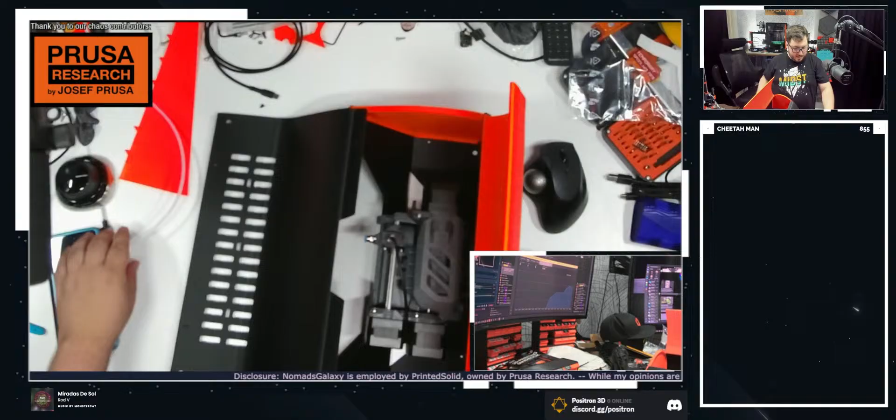Use some spudgers to kind of get that in there. Alright, that's it. There we go. This is done. That's it. Okay.

Let's go ahead and close this up fully. Go.

Now, this is the first time we're doing a test fit. We'll be checking in and out while trying to fix my computer. Good luck, friend.

I would offer my tech support knowledge, but I've left that life behind.

Alright, I'm gonna swap over to my lav mic here, so I don't have to shout.

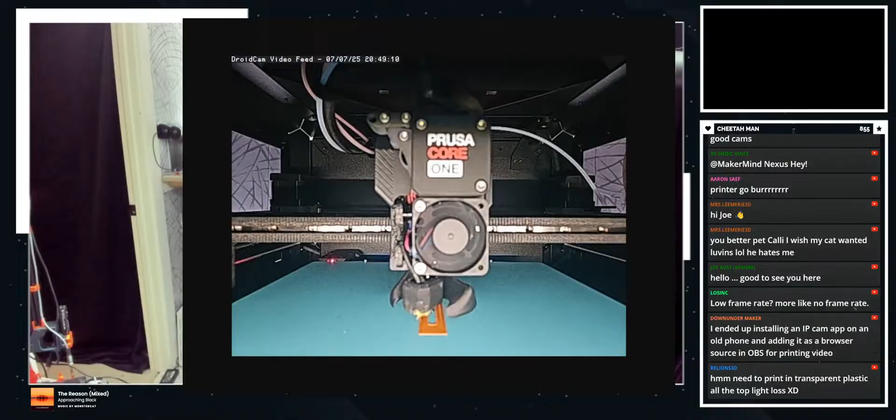Hello Malta, here we go. Yeah, definitely not loving what that PTFE tube is doing, but it's working. As you can see right up there, if I tilt it up, you can see the MMU up there with that green little dot. If we hop up here, you can see your vent grills - you can close them, open them just like normal. But it's working.

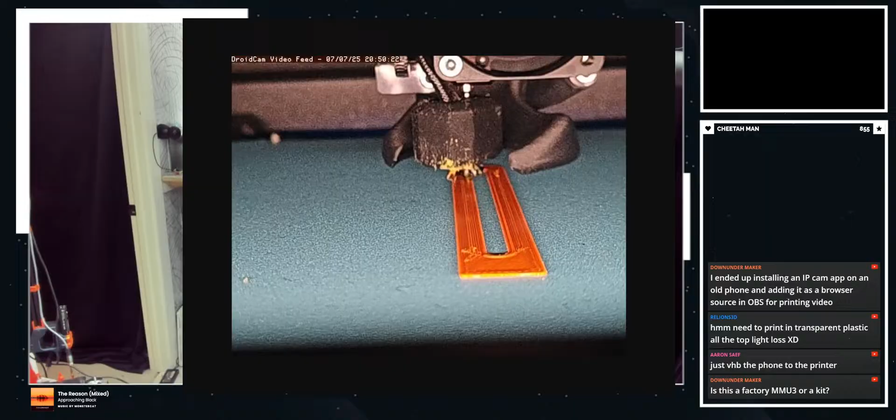I would be concerned with that PTFE cable going all the way to the back. I need to route this better, need to figure out a better solution for that PTFE. I don't know what the solution should be - maybe it is I just attach it to the first Velcro rather than the second. But as you can tell, that print is doing pretty good. I need to clean that nozzle.

Yeah, that's working. All right, we're gonna let that go.

Is that a no - is that MMU the multi MMU, so it's not a factory one. It is an MMU3 that I converted into a multi, but yeah, there's modifications that we did to that.

Shit, I thought that would take longer. I thought we'd be working more on that, but that actually worked. That worked pretty well.

End up installing an IP cam app on my old phone and adding it. Yeah, I have an old phone, but I need to hold on to it as a backup phone.

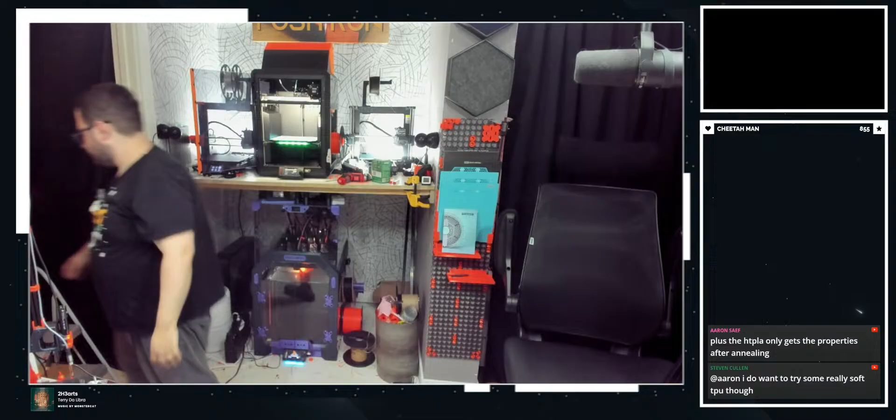Alright, I gotta redesign this lid a bit. Actually give this a... yeah, oh my god, that literally ate my PTFE tube. What the fuck? That's annoying.

Right. Okay. Thankfully, this is relatively easy to access. Okay.

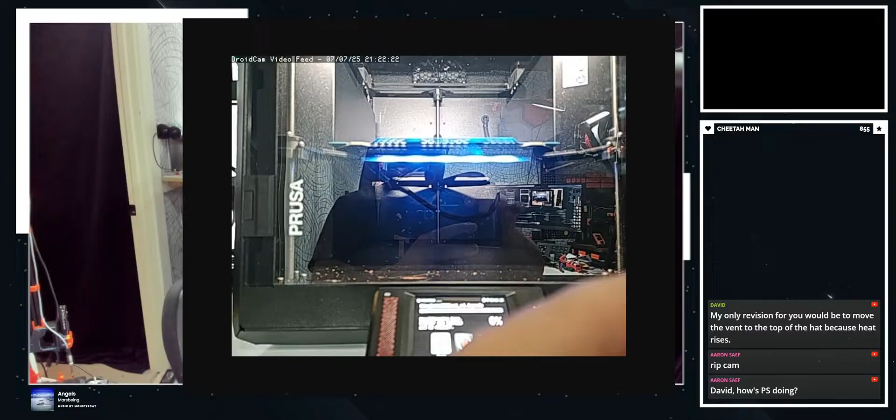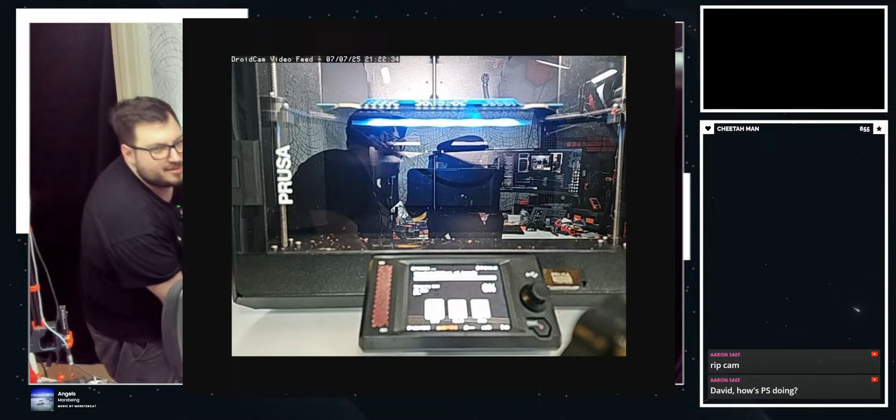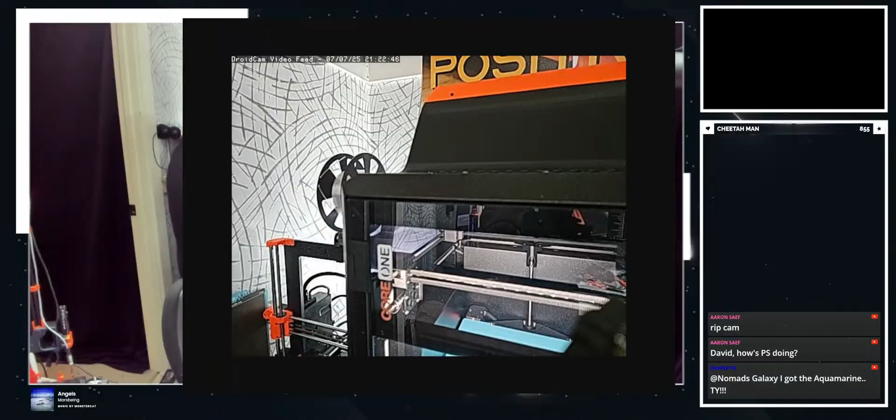All right, you guys are getting the stool now, because I want this to be taller. I love how I'm just here on the side. Uh-oh. The homing routine of death? Okay, now it's too tall. I know David wants to see me on stilts, but not in this way.

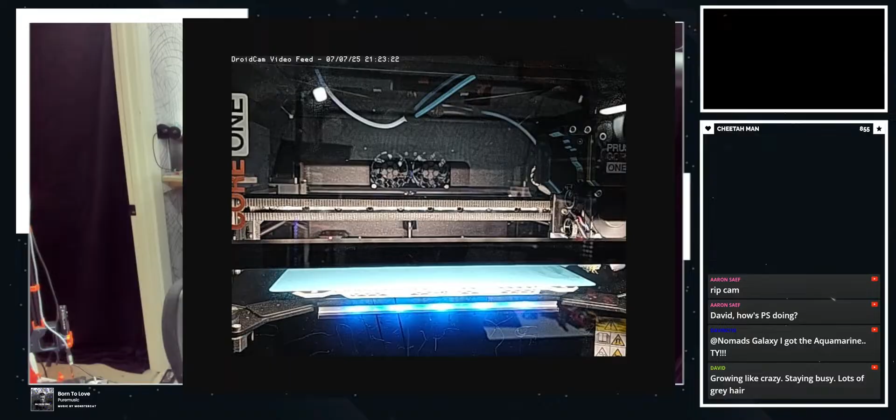Okay. This is sketchy. Here we... Ah! There we go. You're not really going to be able to see the print, so let's lower this. There we go, right there. Okay. And now I just have to hope my phone doesn't fall and I suddenly don't have a phone tomorrow.

Ah, nah, David, you look like a spring chicken. How? I don't understand where that... How's that a compliment? Where did that come to be a compliment? Like, who thought, man, I do enjoy being called a spring chicken. Oddities of the human language. Spring chicken ran over by... No, a spring chicken ran over by Dustin's little moped.

Don't you love how precariously my phone is being... Oh, I almost knocked it over. Oh, this is not great. This is sketchy. I wish I had another droid cam to show you just how sketchy that is. One wrong move and my phone is dead. And then I won't have a phone for Open Sauce, which will be a problem. I'll be lost in San Francisco. The self-driving cars are gonna take over, and I'm just gonna be there like, I don't know what's going on.

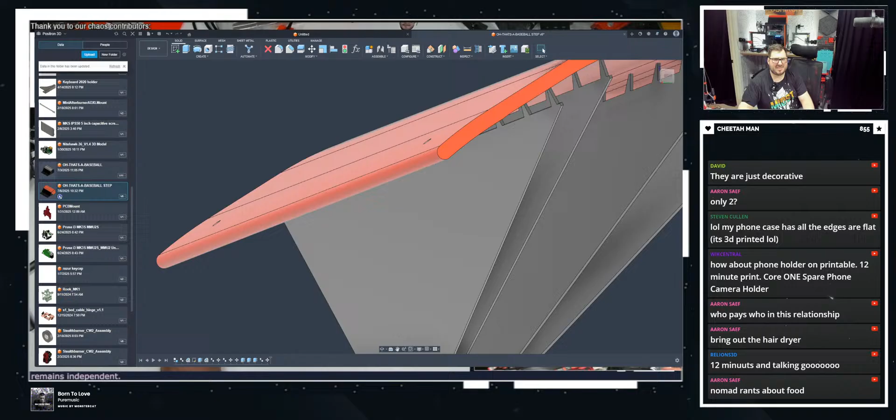So one thing I want to add is just a little lip here or something. Actually, no, I'm adding thumb screws. That should be fine. I want to add something to make it easier for us to lift this lid. Right now it's pretty okay, but it could be better. It's not critical, but here's what I'll do. So what I'm going to do is just add a little lip right here, just like that.

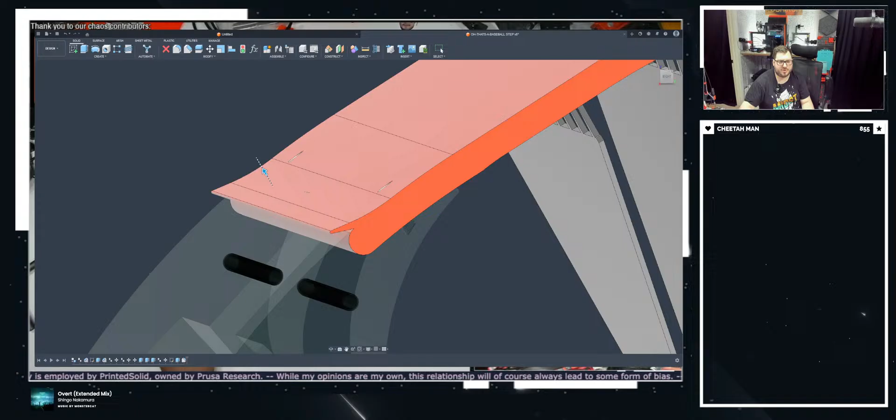Nope, that goes over the screw holes, so can't do that. I need to bring in this. Okay, there we go. Join, and we're just gonna take that. 1, nope, 0.5, nope, 0.25. Okay, that works. That adds just a little lip that you can grab and lift it all up. And we'll just put a little thing right there. All right, that works. Subtle, should be fine. All right, so there's a little lip for you to open up the lid.

Finishing the repair station this weekend. Anything I should help out with? I have no idea, man. That's all on you.

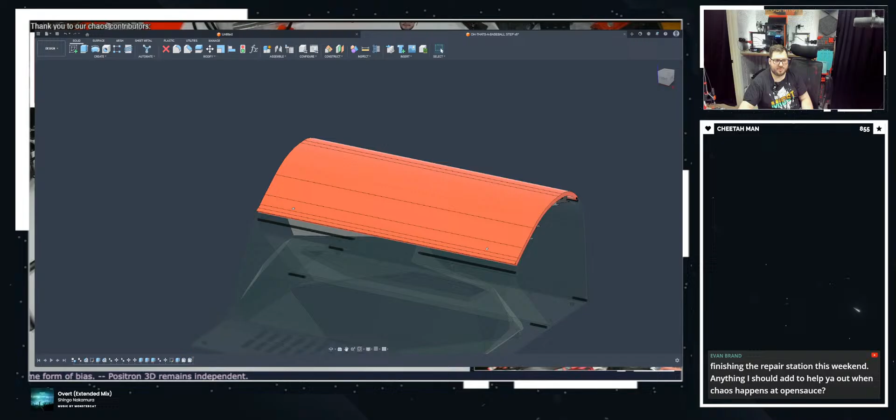My brain can't even come close to fully understanding how you're doing that.

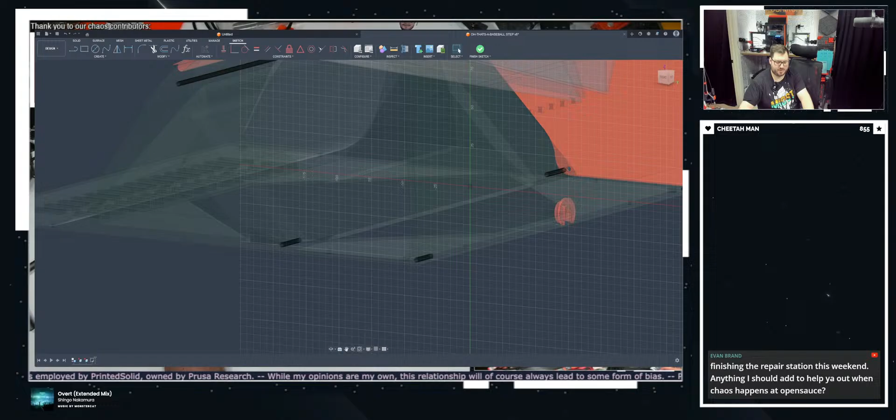Okay, so what we're gonna do, just to make life easier on me, we're gonna remove this. And then we are going to create a component from body. Go in here, going to delete this. Go. Going to start a sketch here, and we're going to just project that. Yep, and hide this and that.

Oh, shit, forgot to project this. Hide that. Okay, so what we're going to do here is just connect these two. Do the same for here. And the rest of this should be fine. Okay.

Now we're going to grab this. Oh, what's going on? Oh, I see. I mean, yeah, I could just do that. That works. Yep, do that. And then chamfer it.

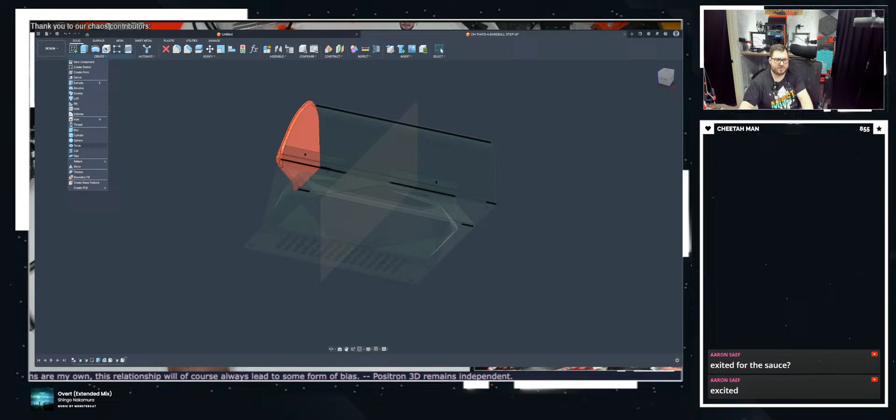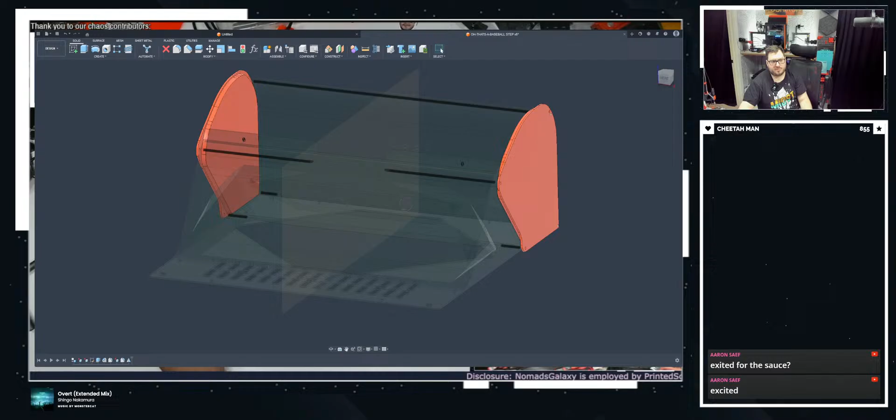There we go, and we'll just clean this up a bit. Okay, there we go. And then I just bring back one of the construction planes. And then what we're going to do is just take this, create a mirror, put that on this plane here, just like that. There we go. That should work. Yep, that should work just fine. And there we go.

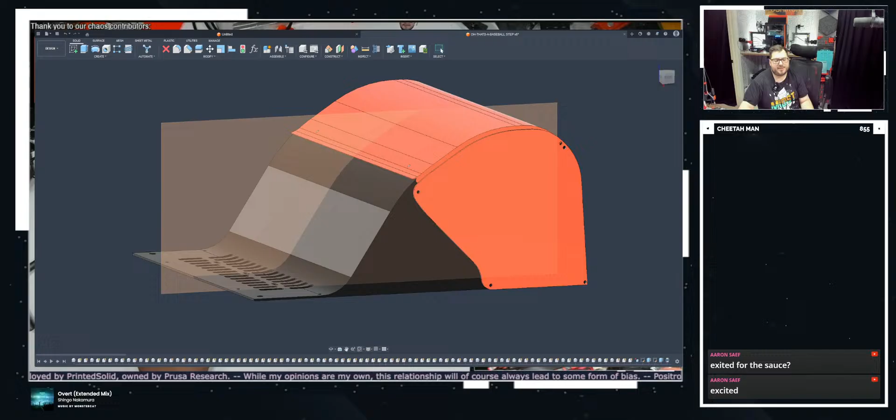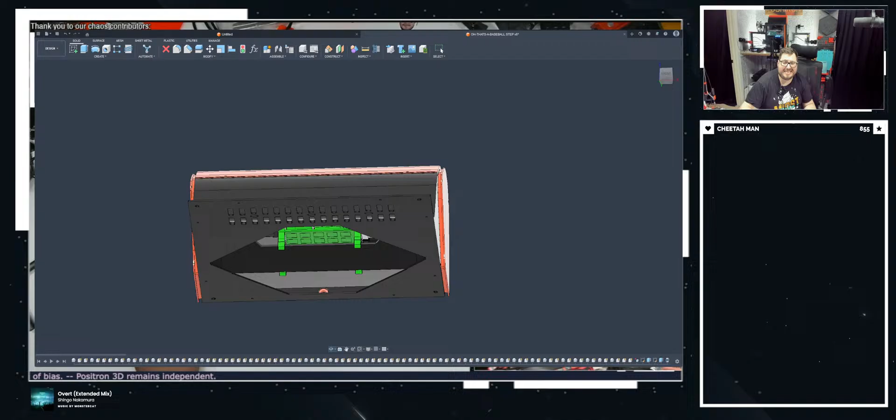So I think, let's see, yeah, I think what we'll do for a revision is we will probably move these grill sets up to here, because I do think David is right. All the air is getting kind of trapped up here. Admittedly, I wasn't thinking of addressing that at all, because I didn't even know if this was going to be successful. But guess what, bozo? And by bozo, I mean me. It was successful! So now we have to account for that. That's on me. Past Nomad did not think success was ever going to be in the cards. But surprise, they were.

Give yourself more credit. I should give myself more credit.

Oh, this is like... is this leaking? This is about to explode. What the hell? Are these leaked? No, why is this about to pop? Like, it's bulged. I don't know if I should drink this. That's pressurized, this is pressurized. I'm not gonna open this. This is... it's sticky. We're not opening this, we're gonna put this in a trash can. I don't know why that's about ready to pop. That's concerning.

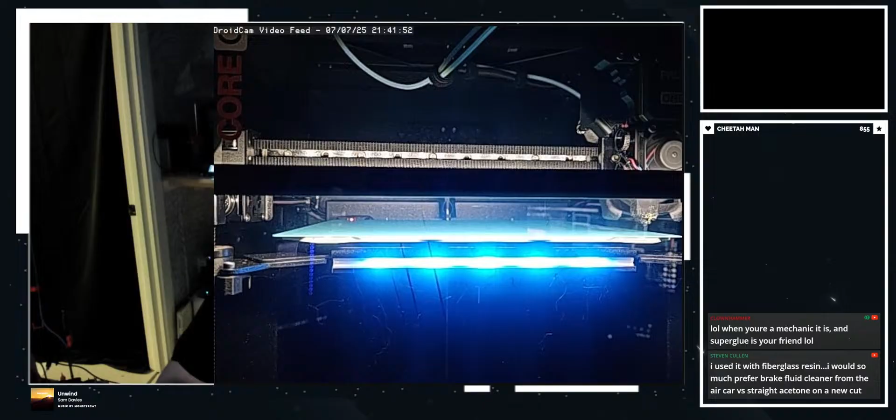All right, here we go. Now I can actually see what's happening on the inside. I'll just be over here, observing in the dark.

Whoa. This is... I didn't check to see how long of a print this will be.

Oh, and there's Nathan raiding in with their meme.

Hail to the queen, baby. I don't know, how can I put a spin on your joke to make it better? That's what's going through my head. How do I take your joke and improve it?

You never look better. Oh, thank you. People do say I have a face for radio.

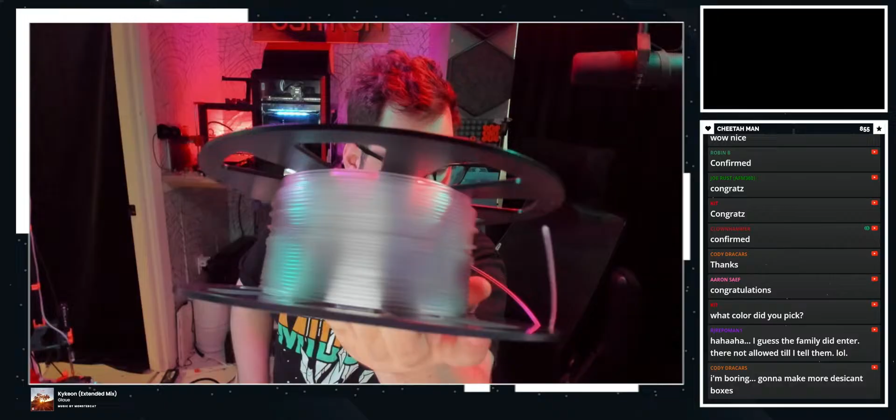Let's see, you picked transparent PETG, natural PETG. That's normally not a color picked. I have it right here, so I can show it to you what it looks like. For once, someone picks a filament that I actually have and use. Oh my god, this is natural PETG. It is totally clear, I love this stuff. This is great, I actually use it for my light bulbs up there. So these are Philips Hue bulbs, and they can turn whatever color I want. So I use natural PETG as their lampshade, so they can adopt the color I want.

So it's not influenced at all, it's great. What resin is used? I don't remember the PETG resin, it's good stuff though. Is it NatureWorks? I don't know if it's NatureWorks. No, we use 4043D for PLA. I don't know off the top of my head what we use for PETG, but if you message support@printedsolid.com and ask them what it is we use, they'll be happy to tell you. I just don't know what it is off the top of my head.